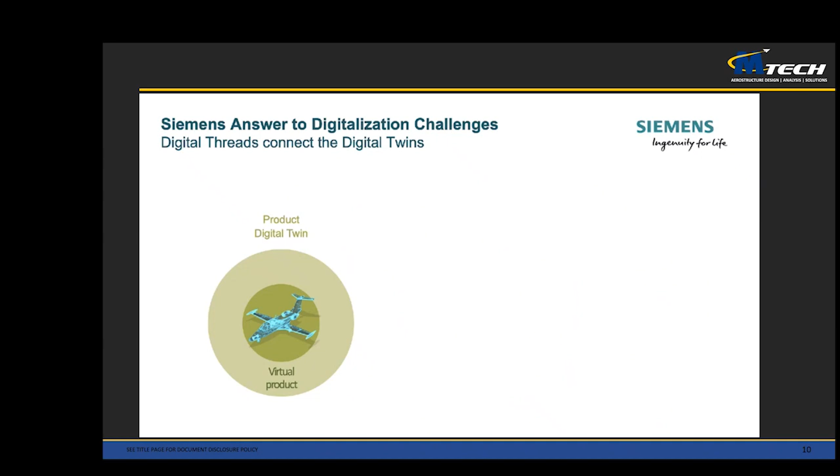The concept of the digital twin and the digital thread are related. A digital twin is something most of us are comfortable with—it's a model of a real device. In the aerospace world, we use various simulation tools and multiphysics simulation tools, and we create this virtual product, which shows what the plane's characteristics are going to be and how it's going to be shaped.

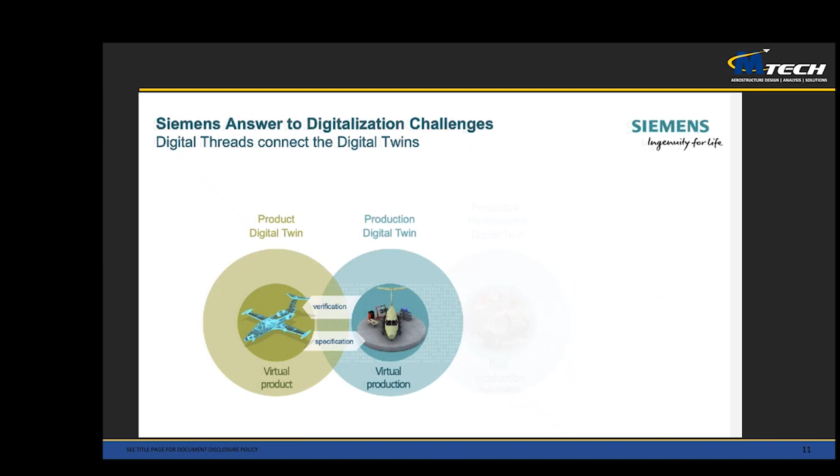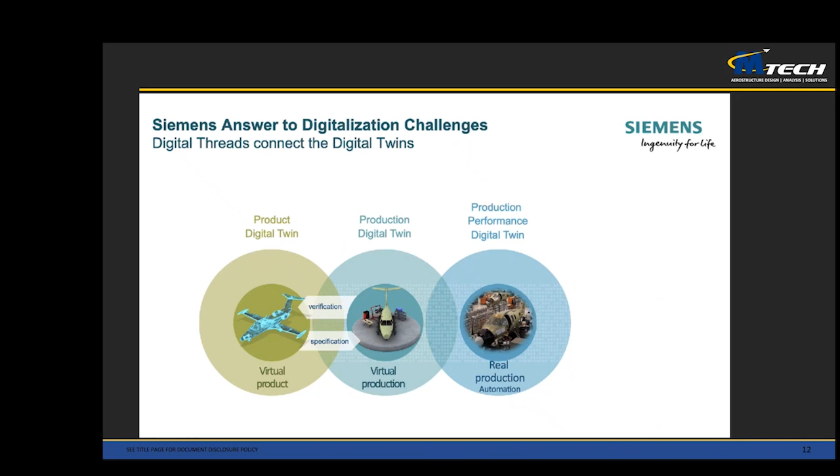We can use that to start to show how we would build such a thing and create a virtual production line—this is how the parts will fit together and where. Then we'll iterate back and forth between those two, through the agile process, making the plane better and better, until it's ready to go to real production. At that point, we automate the factory and make a digital twin of the factory, making sure the assembly lines are balanced and that the system can move forward in that way.

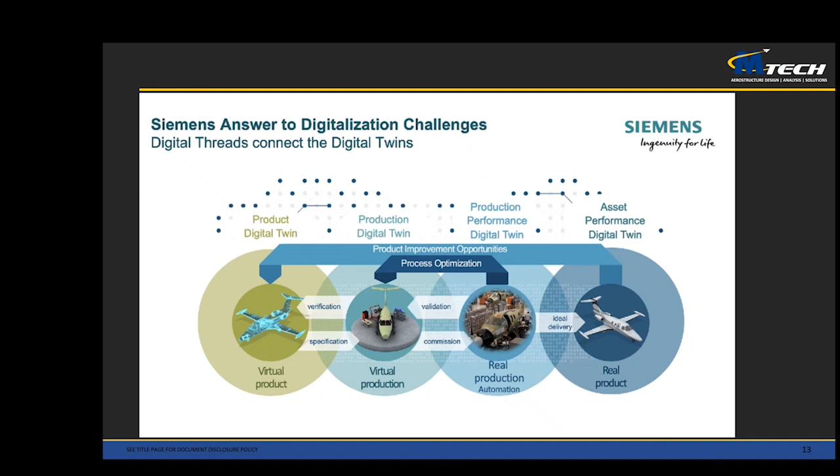We ship the plane. We have a digital twin of the real plane, and we're using that to track defects and to track customer support issues and service issues, feeding those things we learned back all the way to the beginning of the process, so as to improve later iterations of the same aircraft.

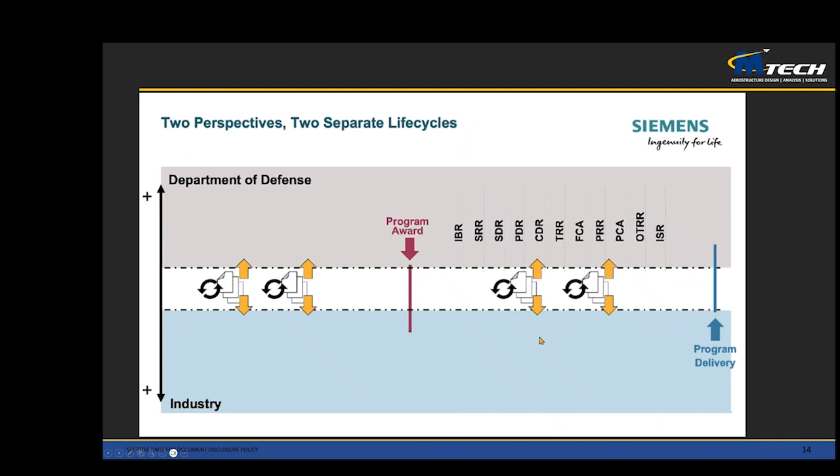Until now, we've had this sort of picture where you have the Department of Defense that defines what needs to be built, and then the industry that supports it—and there's a gap between the two. Defense is up here, and the industry is down here. These are the milestones we've had for decades that go through all of these steps to build a plane, and two of the ones we're going to look at are program award and program delivery.

Those are the two that people know the most in the process. Take the current B-21 rollout right now. We think about this process: it's two organizations taking all of their intellectual property and essentially dumbing it down to paper. We are passing paper back and forth today—I suppose they're in PDFs, but still it's paper. This is the state of affairs up until recently.

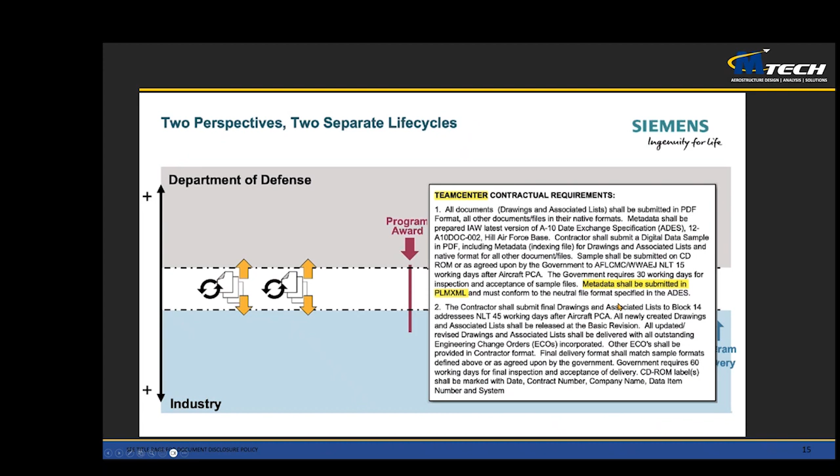Almost a decade ago, the Department of Defense started to say, well, we need to start to use PLM systems for this, and they said that data would have to be delivered in PLMXML, which works much better with Teamcenter.

Now, if we look at what's happening, it starts out in the Department of Defense with them defining the project, and then once the program's awarded, it goes into industry. So the Department of Defense is doing the requirements, systems engineering, and analysis of alternatives, meanwhile passing paper back and forth with industry to iterate on the process. We have cadence meetings. The industry now has the requirements management, design, simulation, and this follows multiple tracks as the program is built and delivered, and more cadence meetings, and again, paper, and eventually an airplane.

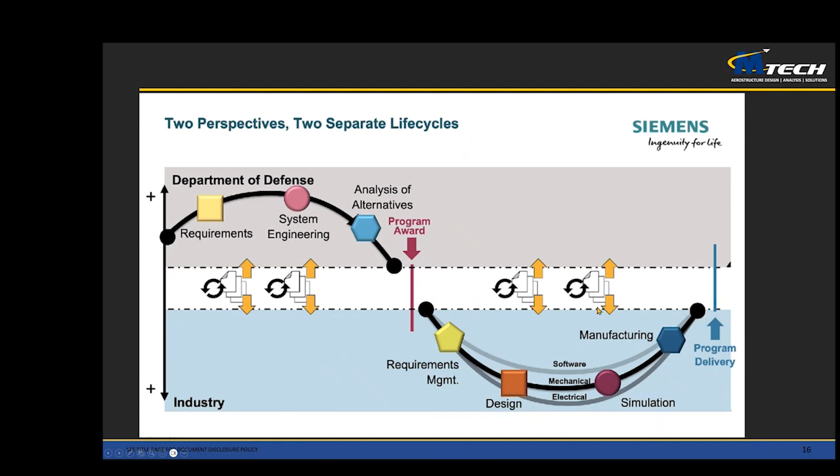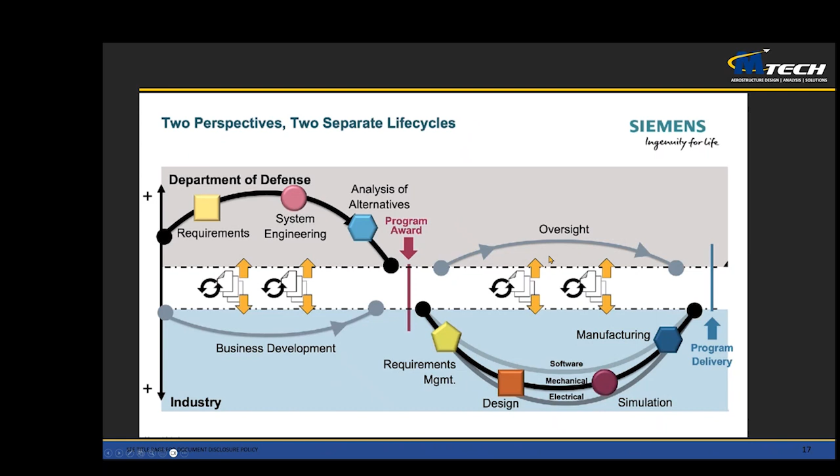Meanwhile, one side is actively working on the project and the other side is doing shadow work. When the project is being defined, industry is trying to help guide it to where they can build it. While it's being designed and built, the government is watching and providing oversight of the project. And again, paper going back and forth, cadence meetings.

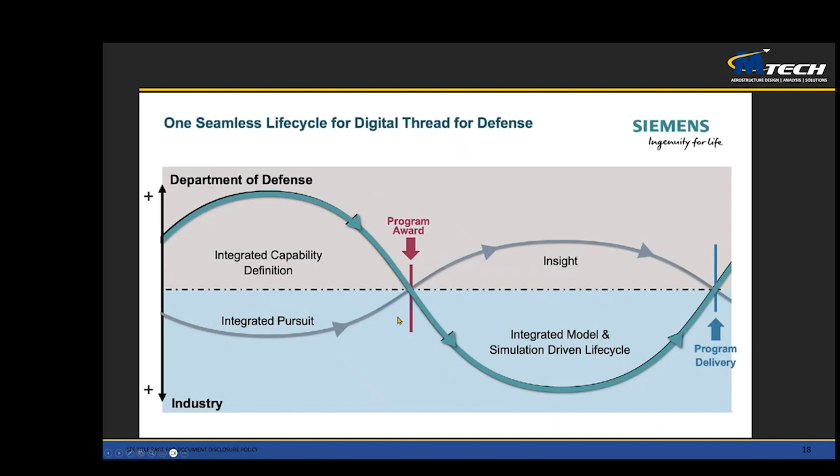That's what we want to get rid of with Teamcenter and Accelerator. It looks like this: we create one unified system across two organizations where we're no longer passing paper back and forth. What we're passing back and forth is models and the original design data.

And that allows us to take this process and shrink it. The program award happens faster and the program delivery happens faster. We've had planes now with this system to be delivered and built in 18 months, and it's an agile system.

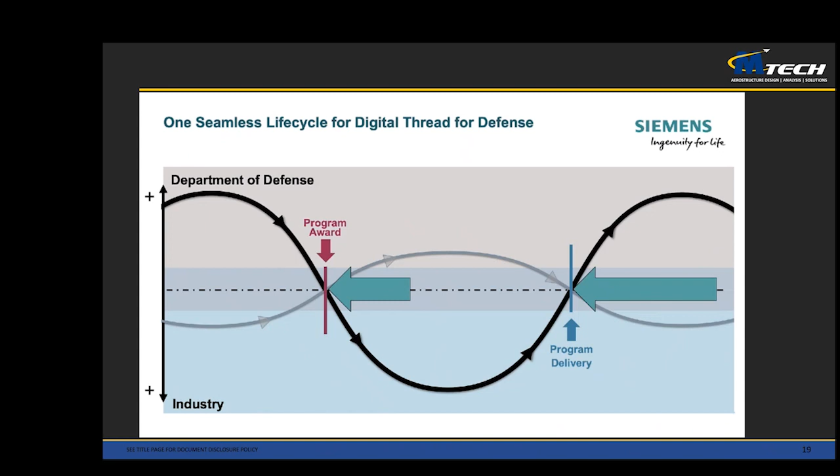So this plane delivered in 18 months is the first iteration of the plane. It flies. But then you can start to add ordnance to it, you can start to add other systems onto it. But you now have something to work with and the models to build upon.

When we think about how this process works, there's still a lot of steps, but the steps are now part of an organized flow between two organizations, and they don't have to send paper back and forth. They're all looking at the same database, and they're all looking at the same data.

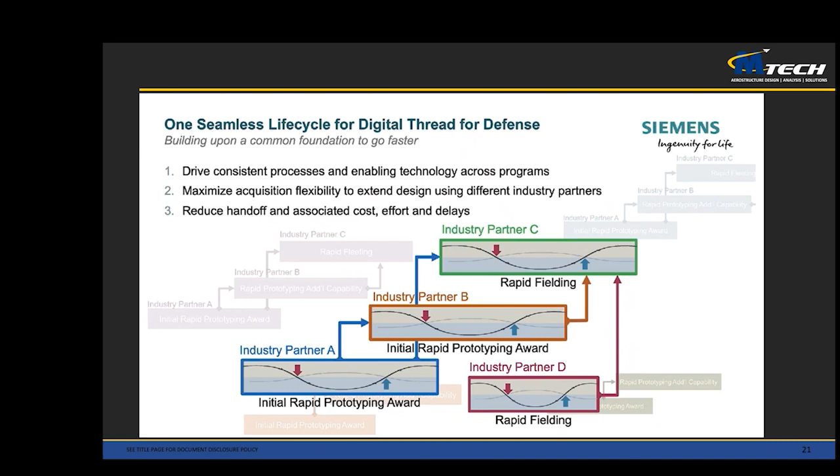And you don't have to do this with one partner. If you're going through this process with one partner or vendor, you could be going through this process with another partner. If you were the DoD and you find out who is going to deliver you the best plane, or a third, or you can take another partner and use them for fielding the plane. So you have flexibility—multiple projects, multiple partners across multiple phases—all because everybody is using a centralized database system to hold design data. So let's look at a demo, so to speak, of this process.

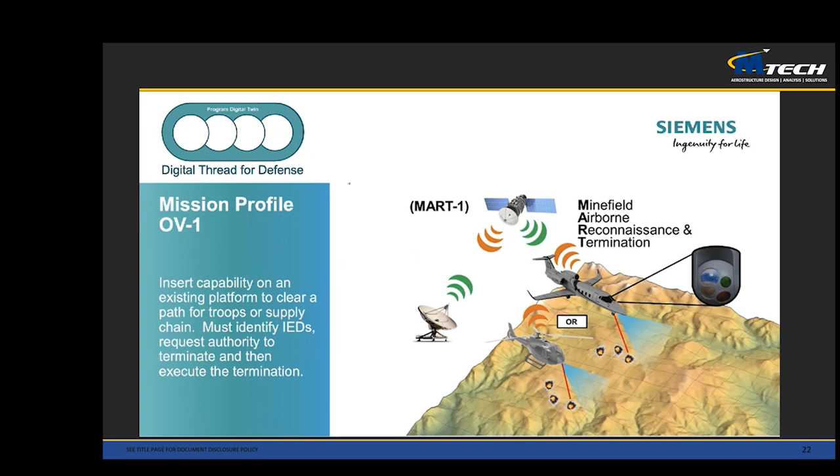So let's say there's a project and we need this project, and we would know how that would work. Think about this: the project is the fact that we have soldiers who are in areas with IEDs, and we want to have something that flies—an airplane or a helicopter—and looks for IEDs. As it flies along, it has sensors that recognize IEDs, sends back locations and requests to take them out, and then it can take the IEDs out before the trucks roll by—either with a super cool laser, or maybe simply with a missile. But this is the basic idea of what the DoD wants, a very simplified idea of what the DoD wants.

So how does this start? How does this happen? Let's look at this process—we're going to look at each step and a little demo of how each of these steps would work.

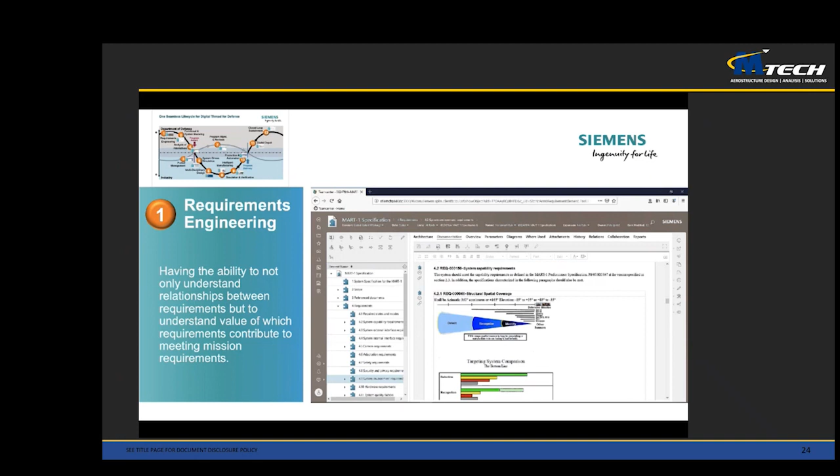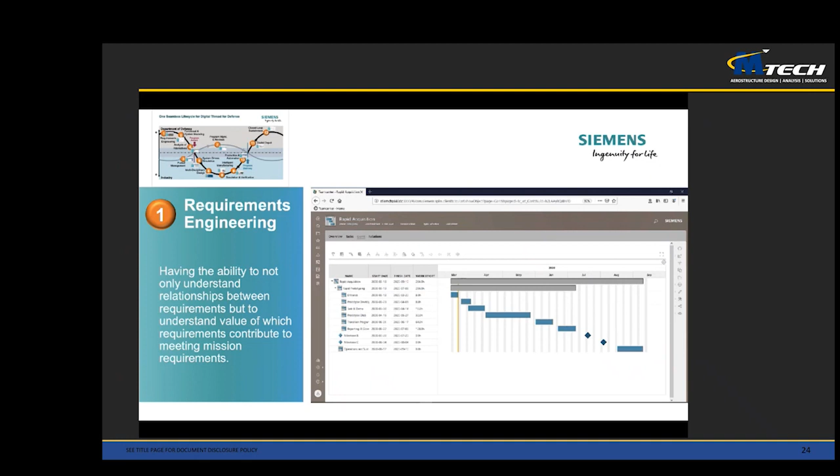Right at the beginning, we're doing requirements engineering, and this is critical. Mistakes made at this early stage that don't get caught are hugely expensive—they completely change the architecture of the following designs, and may create bottlenecks in materials or manufacturing. Things way back at the beginning that are not fully understood can wreak havoc with the rest of the project. So here we're taking those requirements and decomposing them, to get some sense of how these requirements will get turned into a design before we move on to the next step.

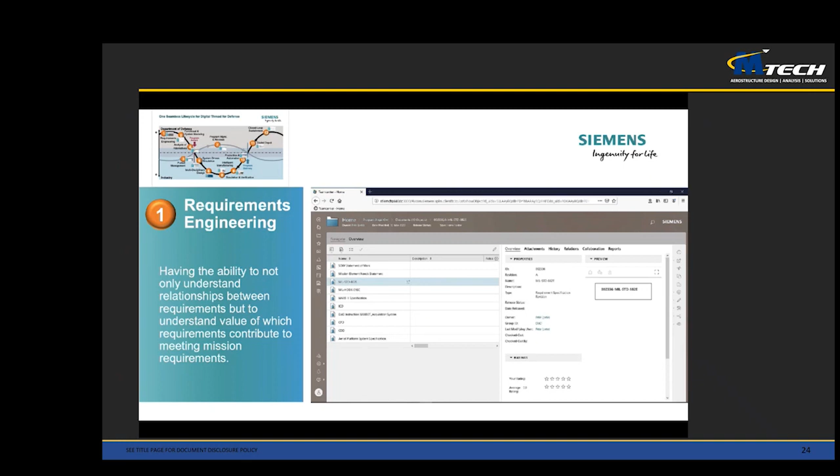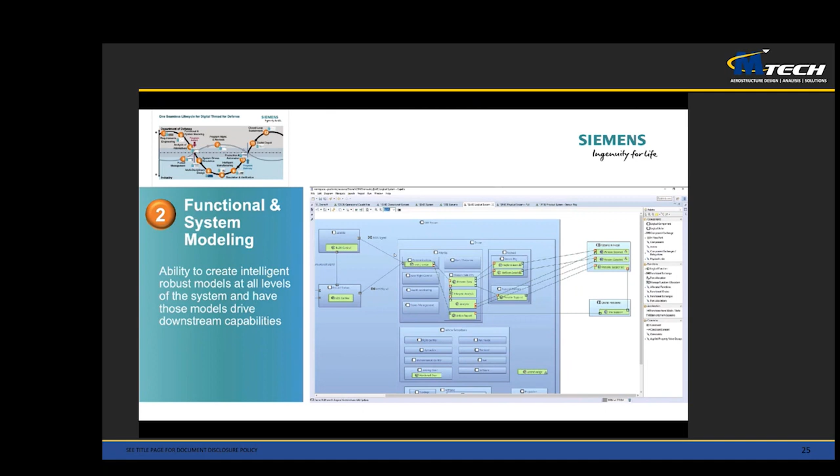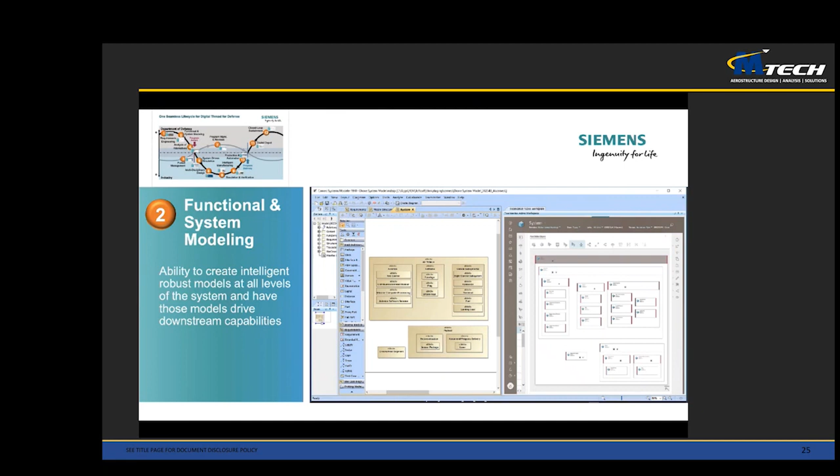There are multiple ways we can solve a problem, so we can use alternatives like the aerial platform. We don't know if it's a plane or a helicopter, but we know what it should be able to do, and we can put that in functional models that show us whether the system works. If it can't work, we can iterate early on before we get industry involved in defining what's physically able to be done. So at least now we have this model of what we want.

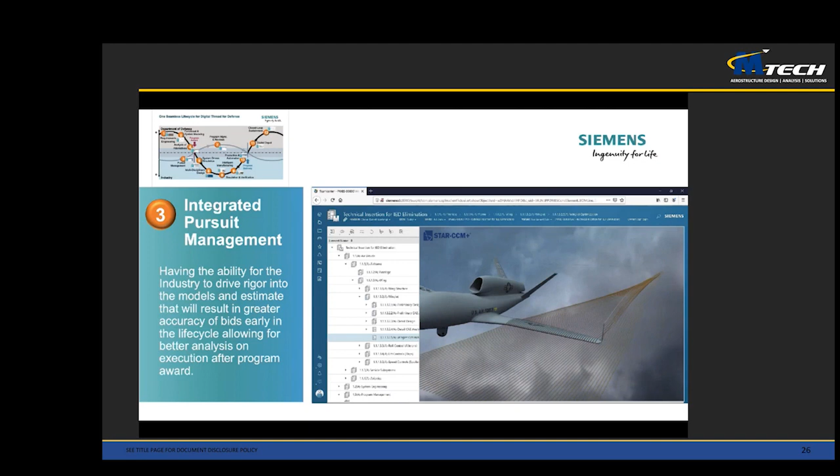Now the industry can get involved in shaping it before an award is even made. The industry can show different physical ways the design could be put together, and implement what up until this point was a theoretical model. The industry then passes these back up to the DoD through a system they're working in together, and the DoD can look at the alternatives.

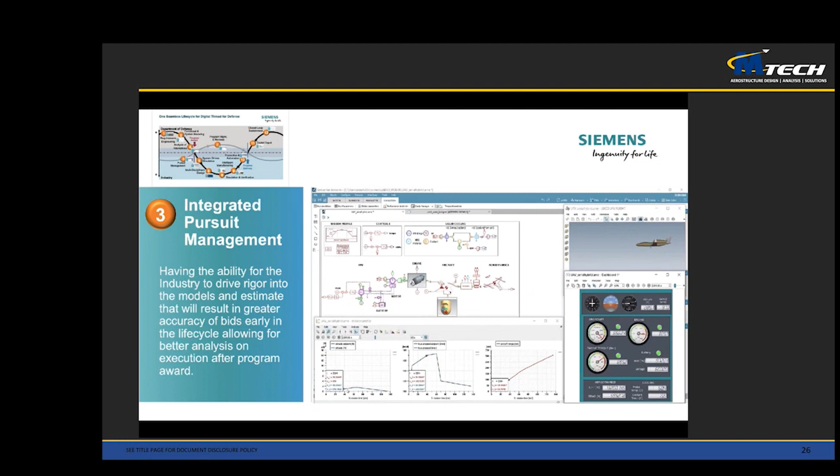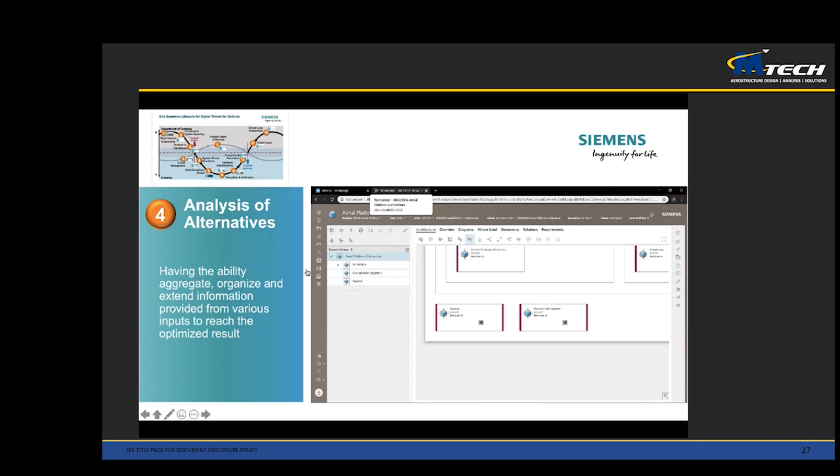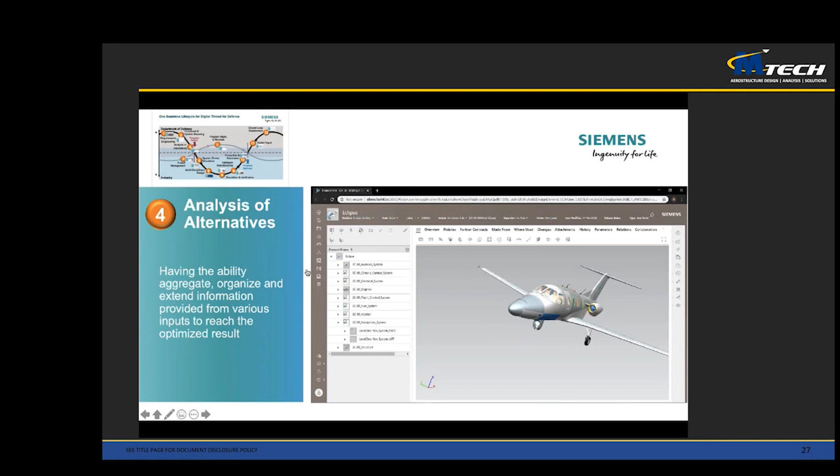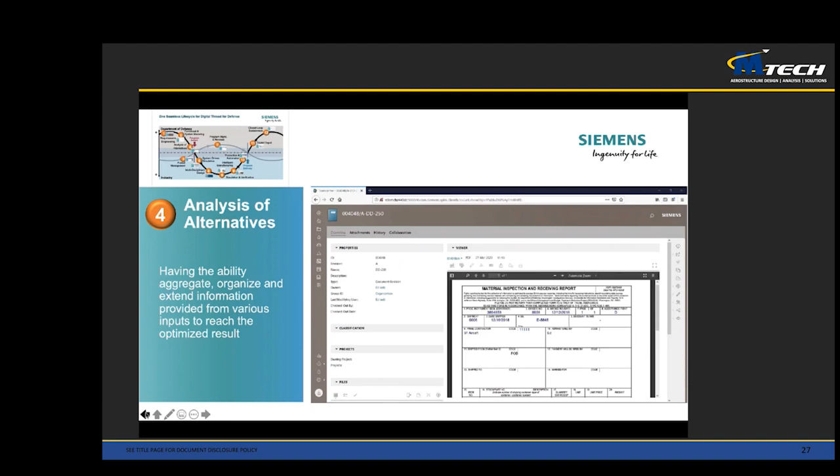When you get to the analysis of alternatives in the award program, you look at different bidders and how close they are to what you need, and whether their design is too expensive, too hard to build, or too hard to maintain. All of this can be simulated up front, comparing one design to another. Here's a helicopter design that doesn't make it, a different kind of airplane that didn't make it either, and finally you come down to the winning bid.

Now the project passes out of the DoD and into the industry partner who won the award, who starts building a design using model and simulation technologies, looking at different ways and approaches to implement what this partner helped create as the specifications.

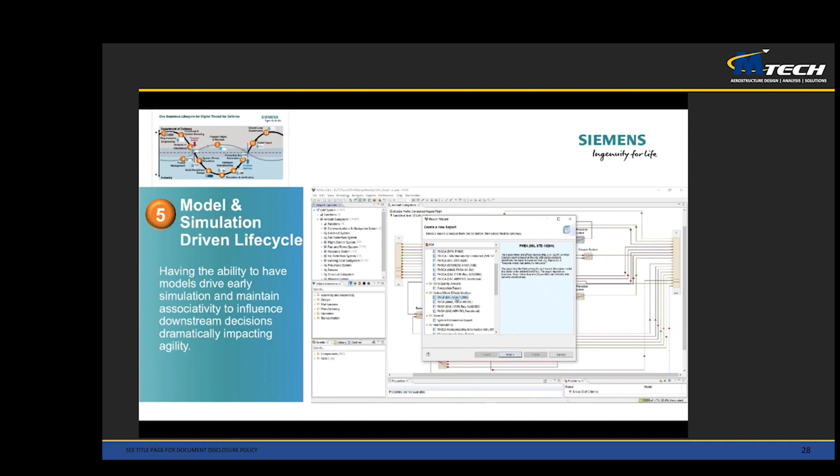The design gets decomposed into smaller and smaller parts. The parts have their own parameters about how they operate, and you can find out about failure rates and failure modes and things that don't work very early on in the process.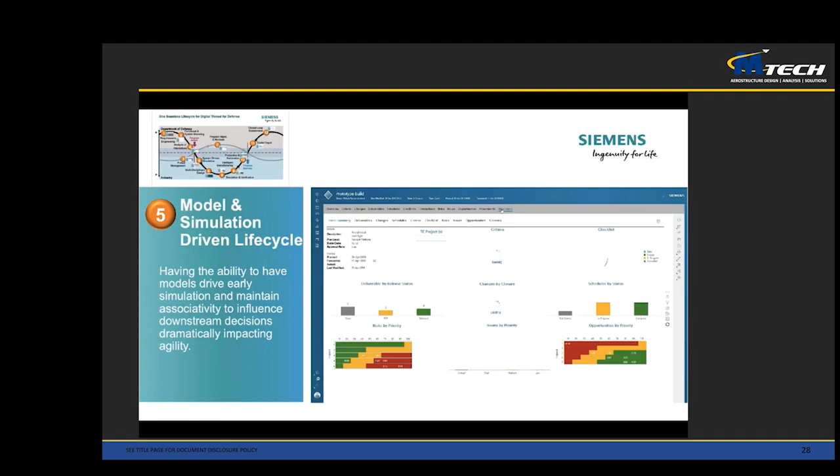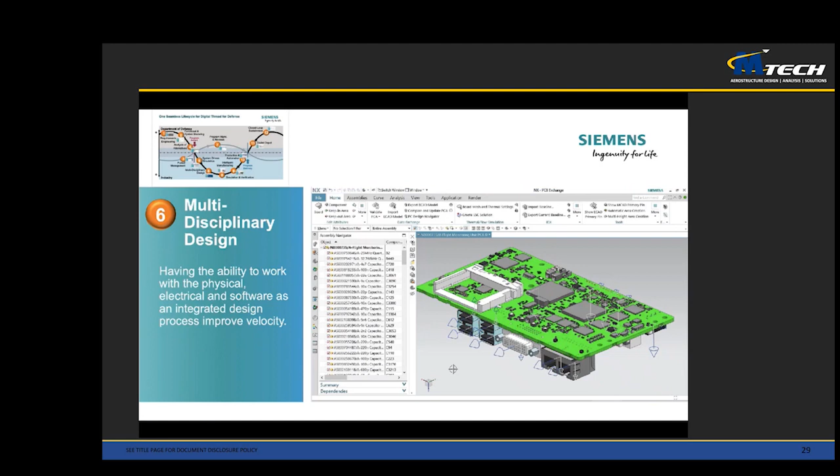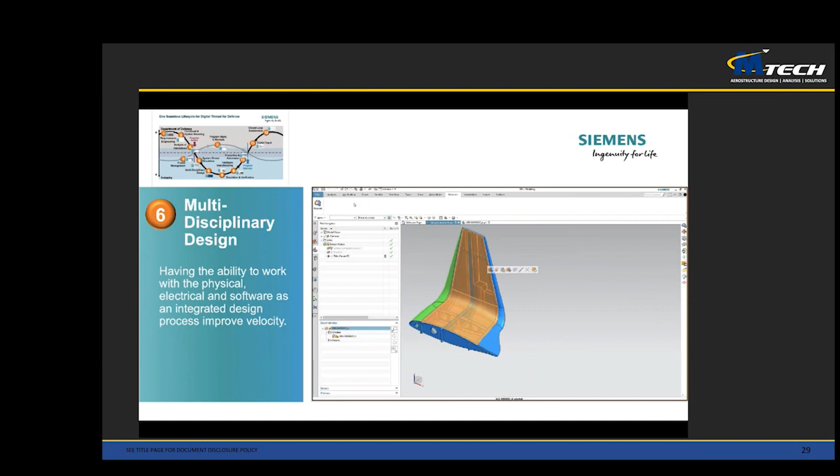We start to design different pieces of it together. We need electrical, we need the airfoil, we need metal, we need the electronics. How hot are they going to get and how do they fit together? All of this is simulated as you go, and all these pieces of the plane are in the database so everybody in the project sees all the parts fitting together.

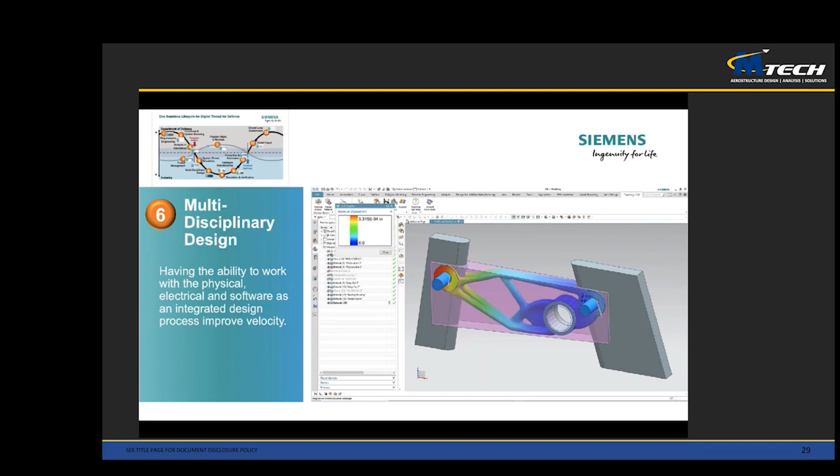You can try different shapes and simulate the stresses on them, coming to some early decisions about your design.

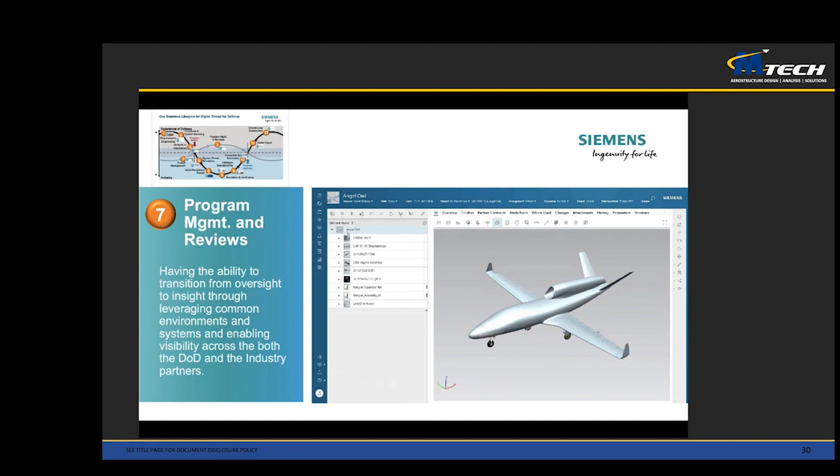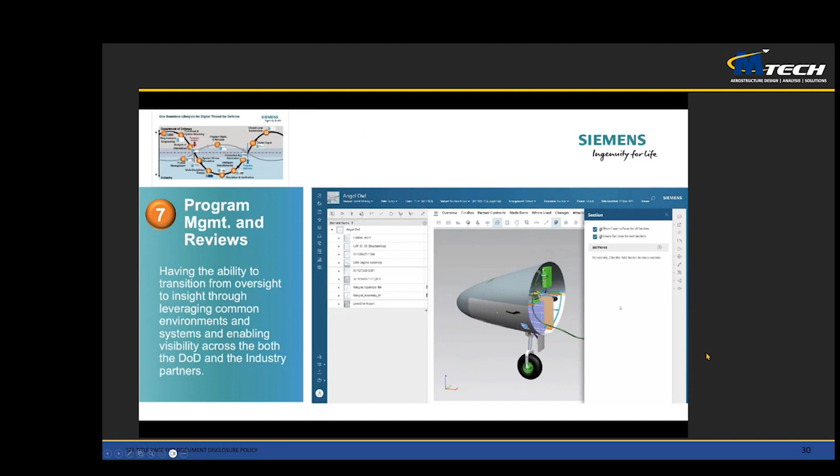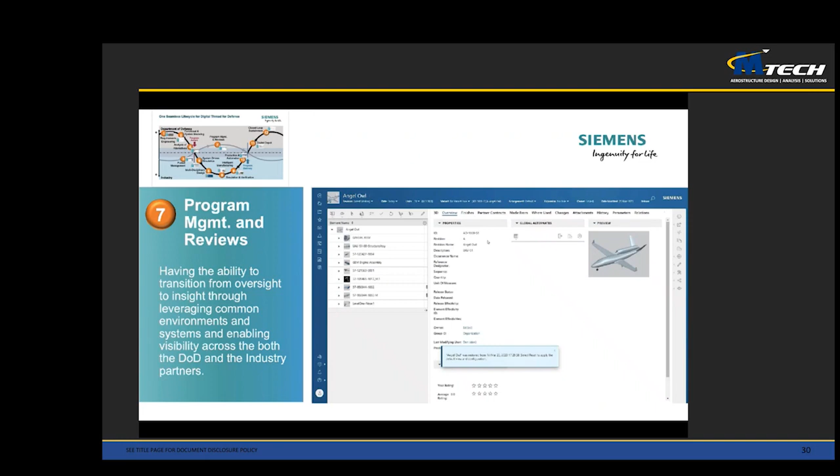While this is going on, the government in its oversight capacity can also look at the design as it's running to make sure the plane is doing what it's supposed to. Rather than going into a physical plane and opening it up to look at how pieces fit together, you take this model of the plane and open it up to see how it's put together, what it costs, and whether it meets the project requirements. You get into much broader sets of parameters to look at and see how it's structured.

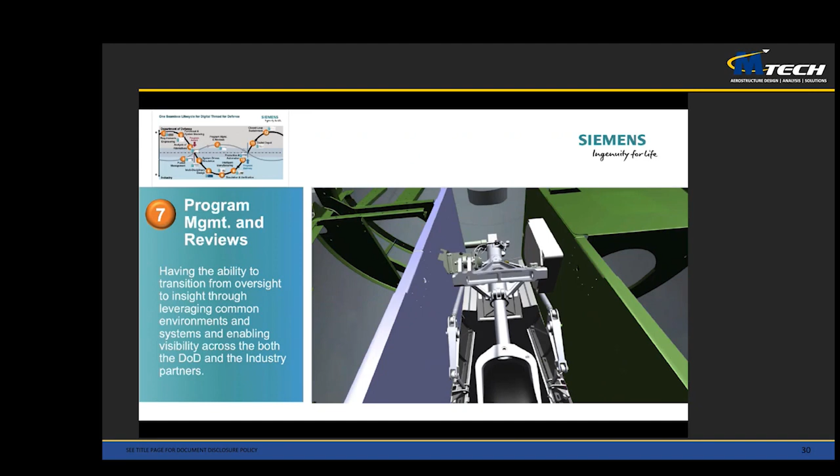The plane is essentially built in a virtual space, and in that space you can take the plane, take some parts off, and look inside to see what's what. This is all being done by the government in the process.

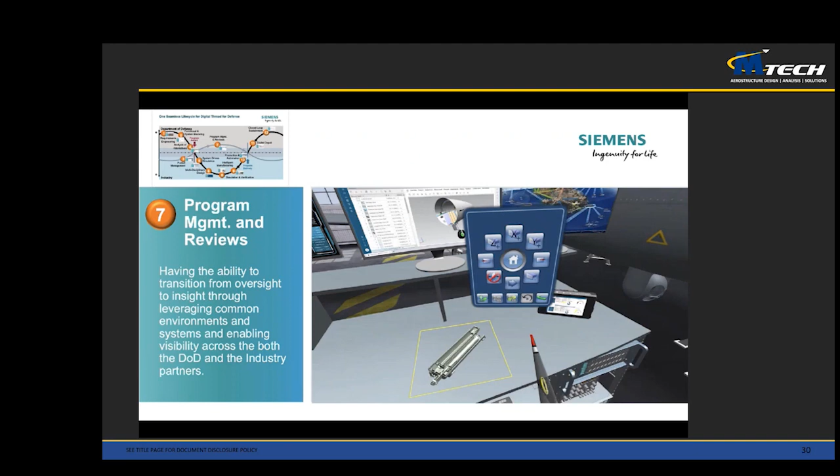You can even look at manufacturing techniques that might possibly be used to simulate, like how a drill might be used to put together this actuator part.

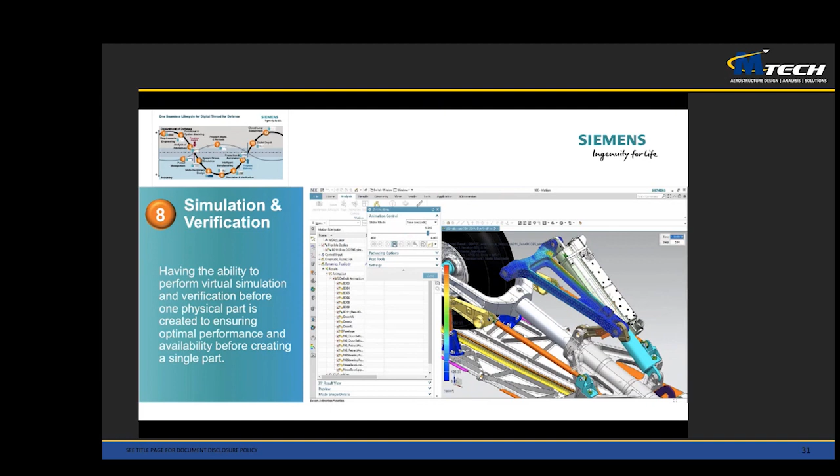Now that the design is inspected and approved, we can get into more detailed simulation. Here we look at the landing gear system and see how the wheel comes up and pulls in. We can look all through the plane and simulate different elements of it.

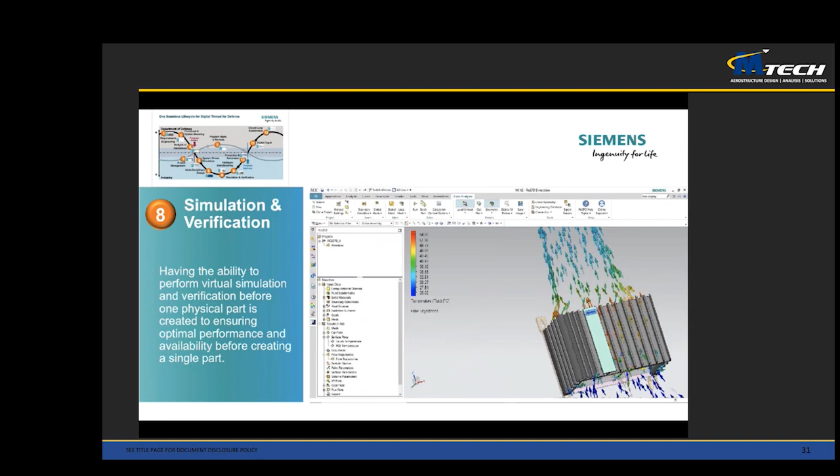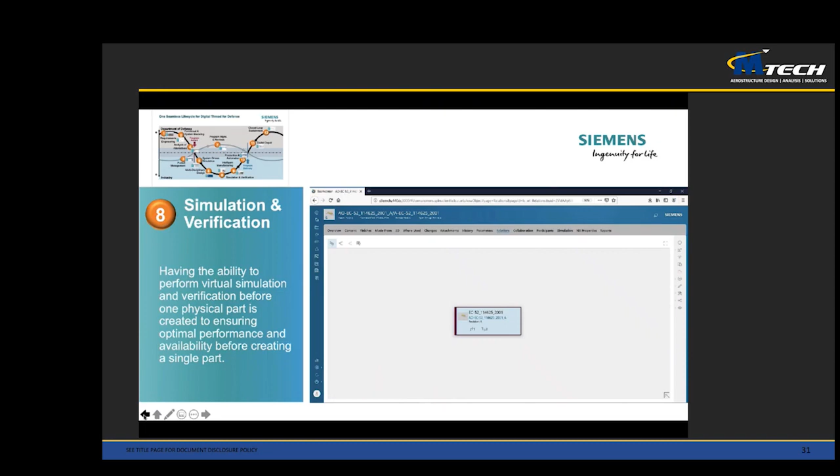This is where IC design comes in. We are able to look at the heat we're generating, the batteries, the airflow, and how it's all going to fit together.

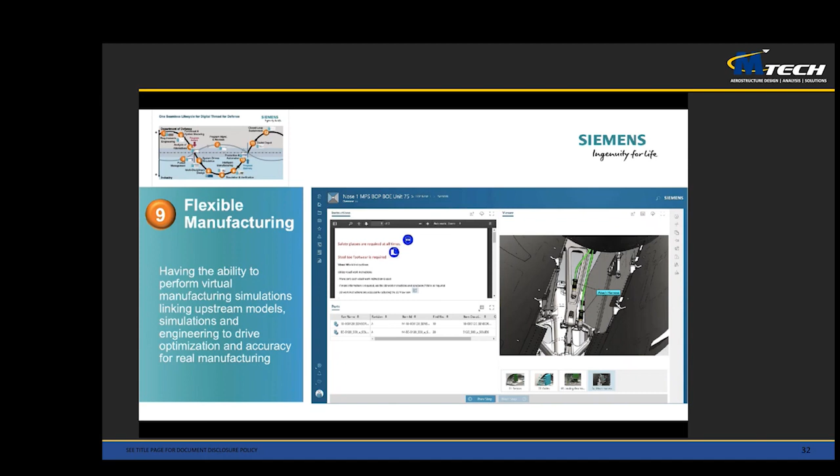Now that you have the plane designed and are ready to go, you have to think about how to manufacture it. You have the manufacturing flow where you see how the pieces will fit, and also how you create the instructions for how to make it.

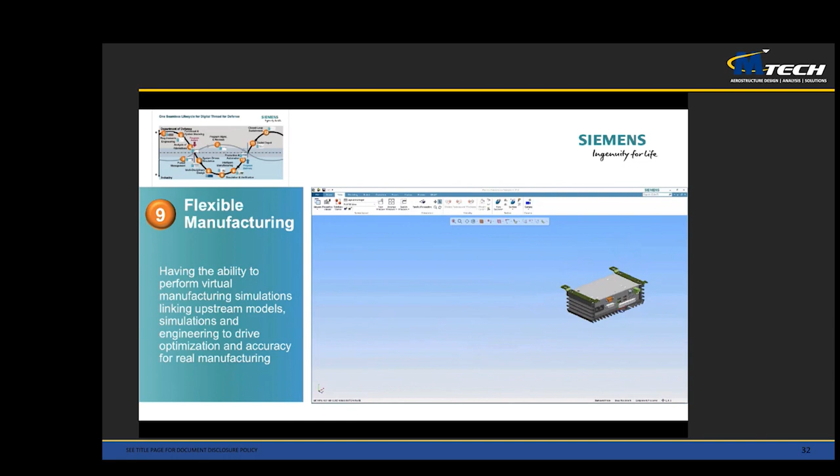So while you're simulating, you're also creating instructions, following the cabling, making sure it all fits, and seeing the process and steps of how and in what order we add the parts to this box to get it ready to be installed in the plane.

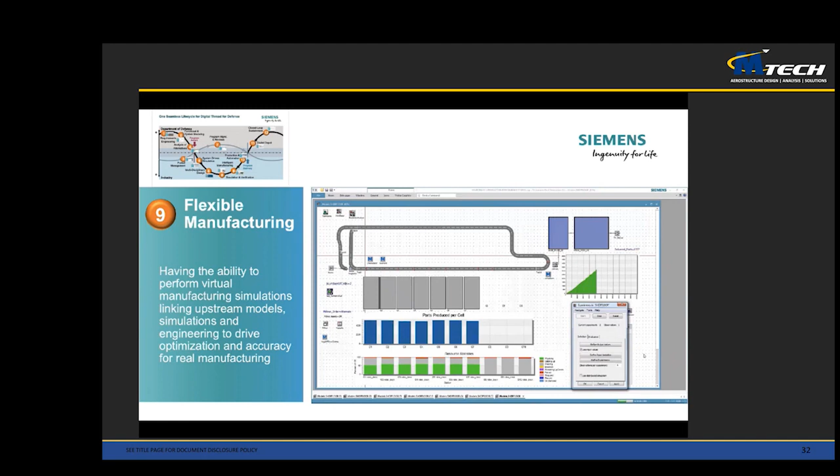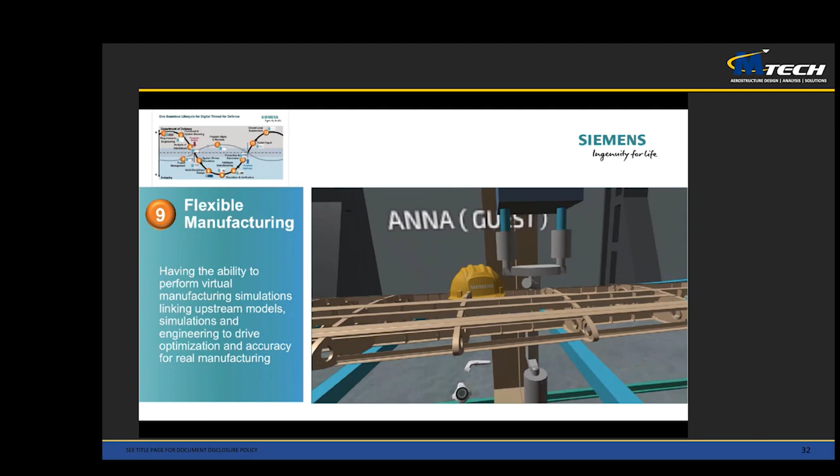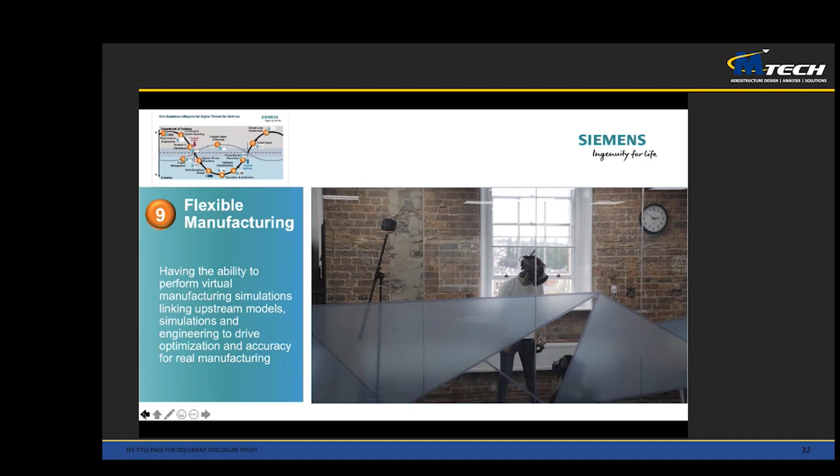We have virtual reality, a way of looking at the actual size of the plane as it's being built, and all the pieces and how they fit together, and whether all the tools can reach it. You may be looking at a design you thought was going to work, then realize this part of the plane gets tripped up against another part, and that's not going to work. We can get all of that figured out before we actually build it.

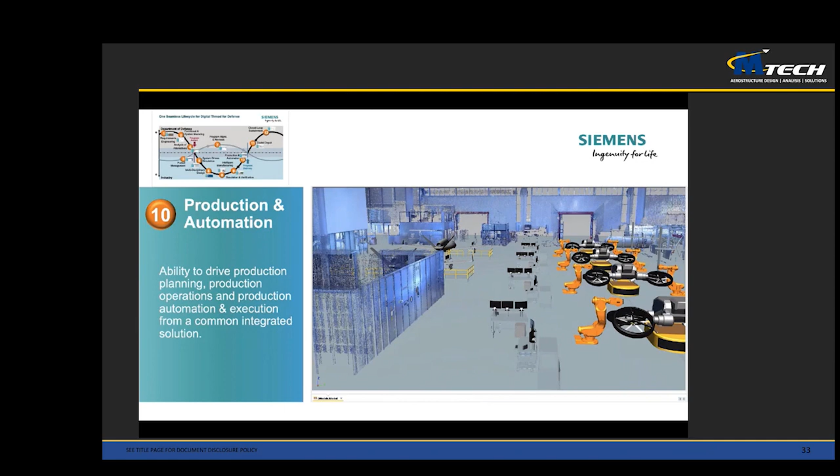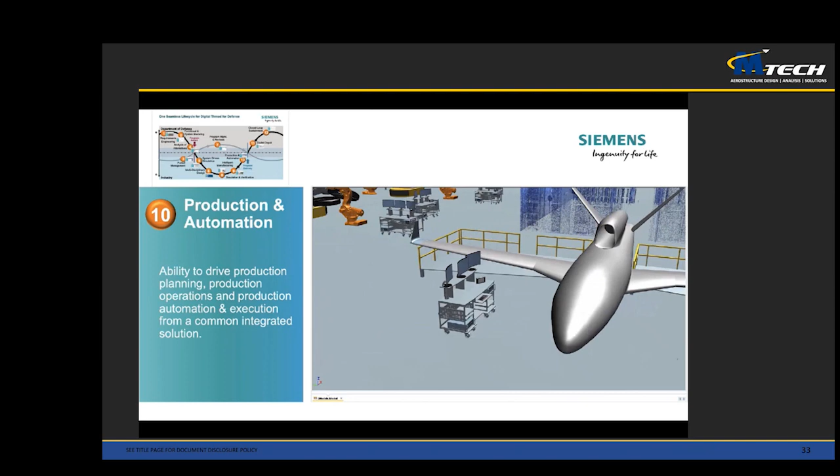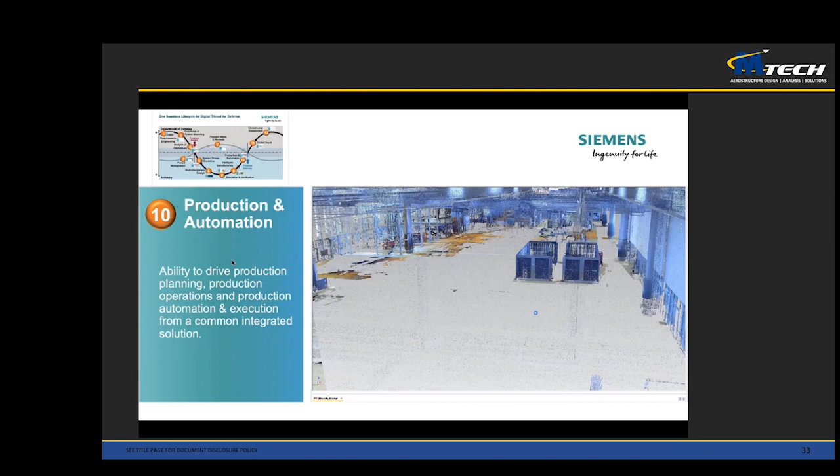Now we know how to manufacture the plane, we can simulate the shop floor where all of the planes are going to be built, how the parts are going to fit together, and how much space it takes. All of this can be simulated in Teamcenter, and all the specifications about the factory and the actual places that could be used to build it are uploaded into Teamcenter, so everybody has a common view of how these parts are going to be put together.

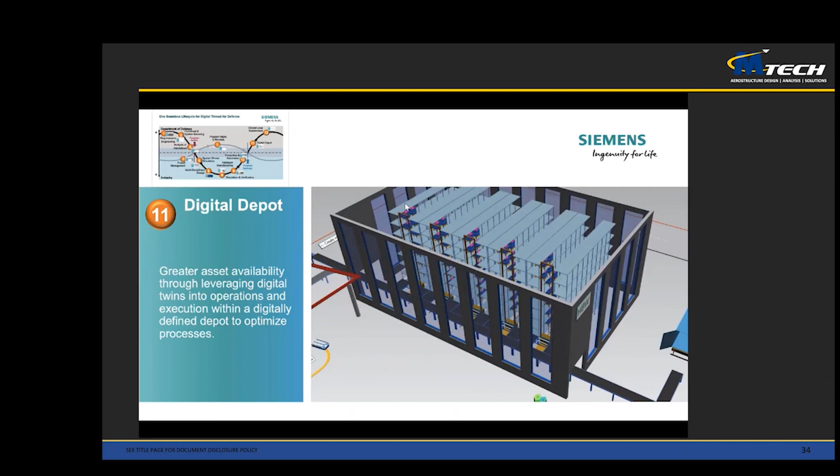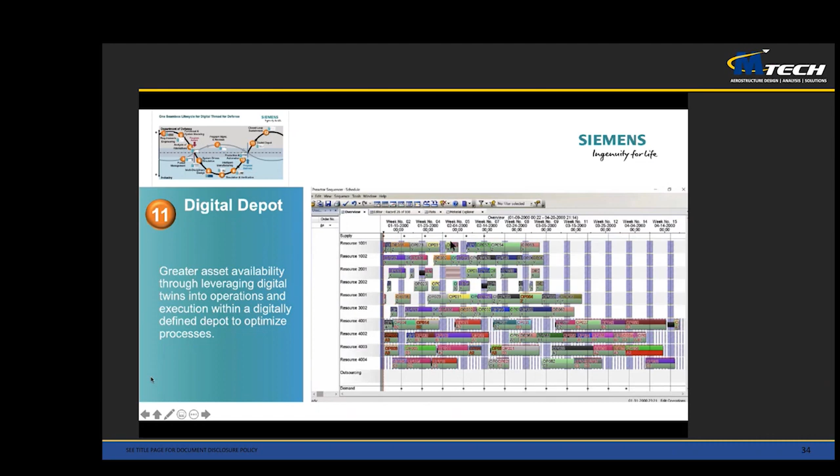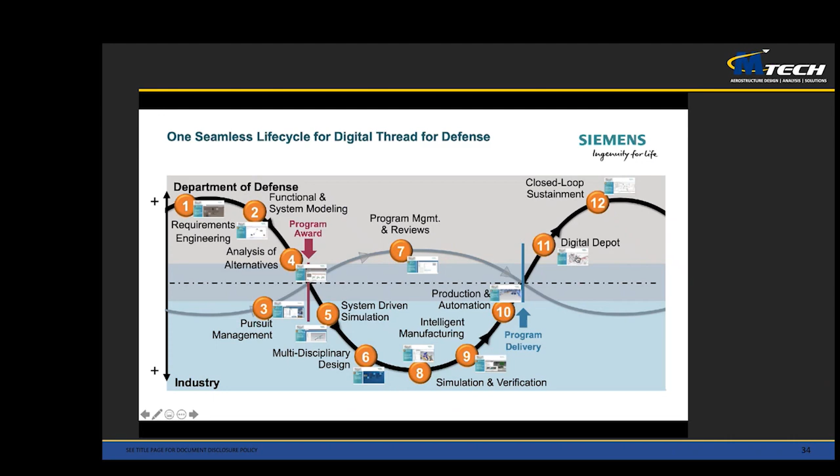Now we've shipped the program delivery, and we want to see how it will be built. The digital depot lets us look at where the parts are built, where they're going to be shipped, how far they're going to travel, and the path they'll follow. Is there anything that would get in the way between one plant and another? All of this is simulated, so the scope of the simulation spreads out over the course of the project, letting us have a more efficient manufacturing system without surprises, such as a tunnel that blocks a critical piece from being trucked from one place to another.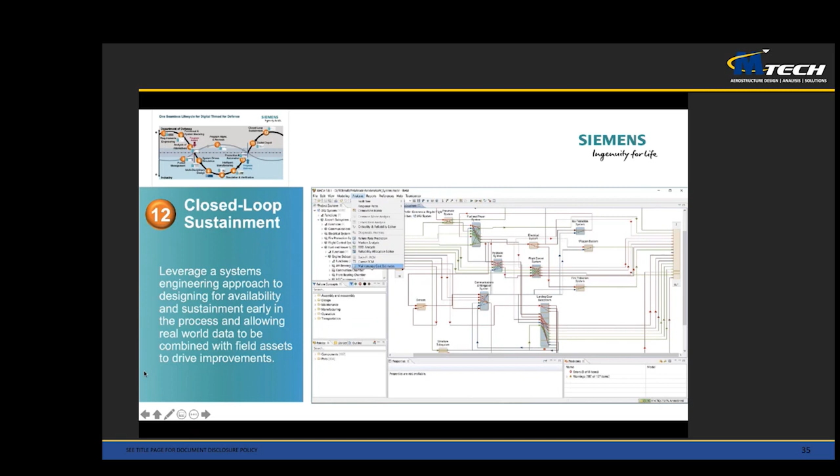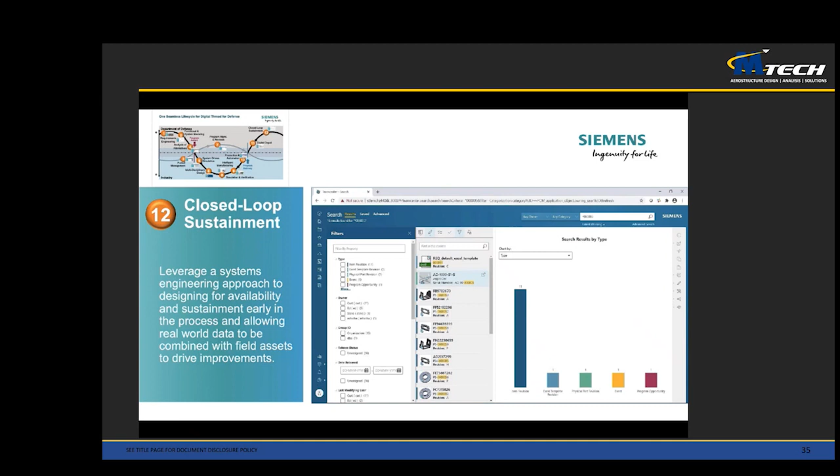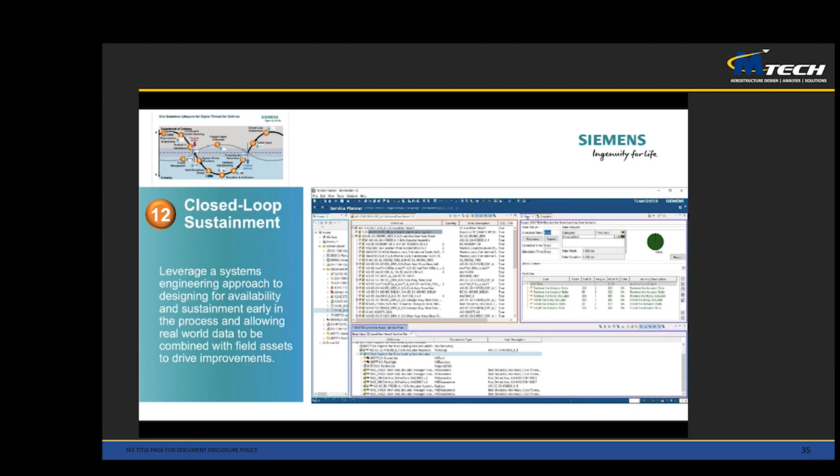And then finally, you have a plane that's out there, built. Now that it's shipped and out there, it's going to need service. We'll find out that there are parts of the plane that aren't working the way we thought they would - they're wearing out more quickly, or elements aren't working in the field the way we described. No matter all the simulation we do, it's eventually going to be in the field, and someone's going to work on it. That data is captured and put back into the system, wrapped around a closed loop to improve the next iteration of the plane or the parts we're putting in it.

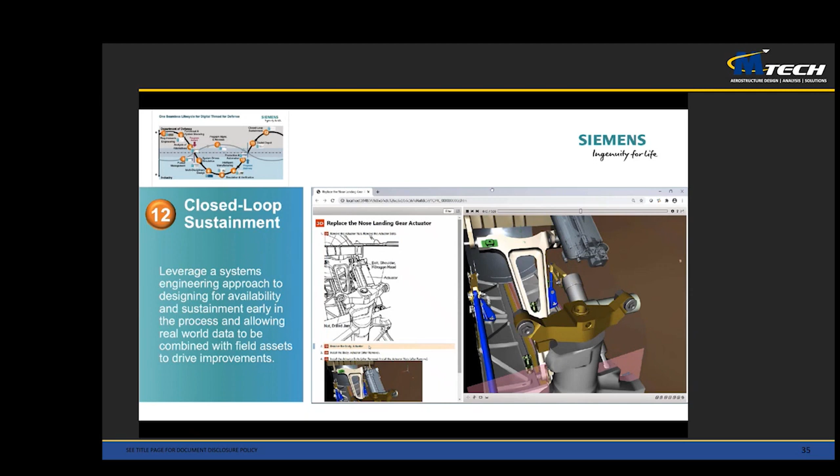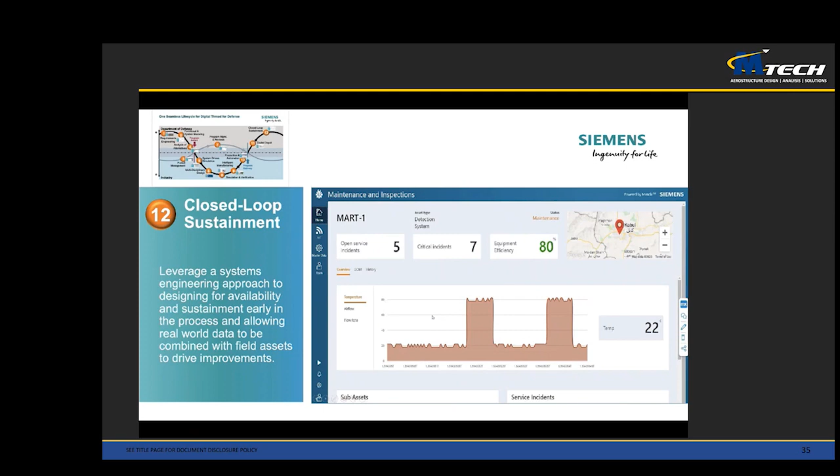So you can see, for example, this wheel actuator - we can see how someone would work with it, so that if a service tech needs to replace it, you see where it is. You make sure it works, and you keep track of the stats about how all the different parts are doing, and what it's costing to maintain this plane.

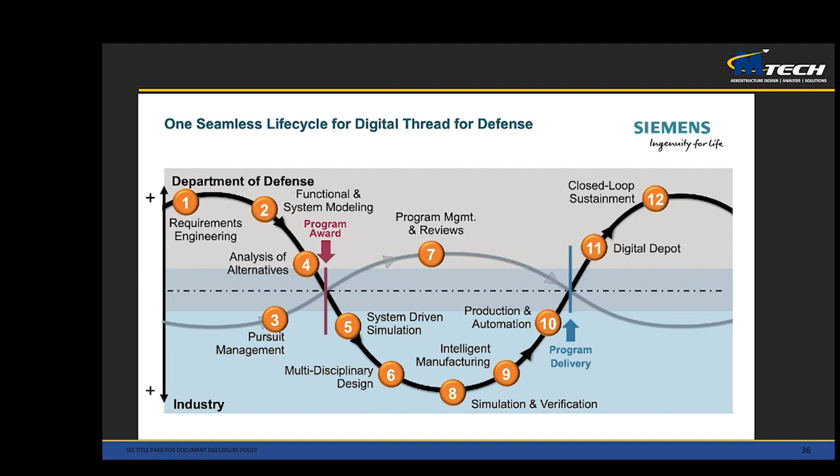So now we've worked through the whole seamless flow. We've had one view of the plane shared by the Department of Defense and industry. Both sides are constantly working with the same model, and the model goes through the thread from design requirements over here, constantly being improved and worked upon until it ships over here. This process from here to here could be as little as 18 months, and has been as little as 18 months for a brand new flying platform.

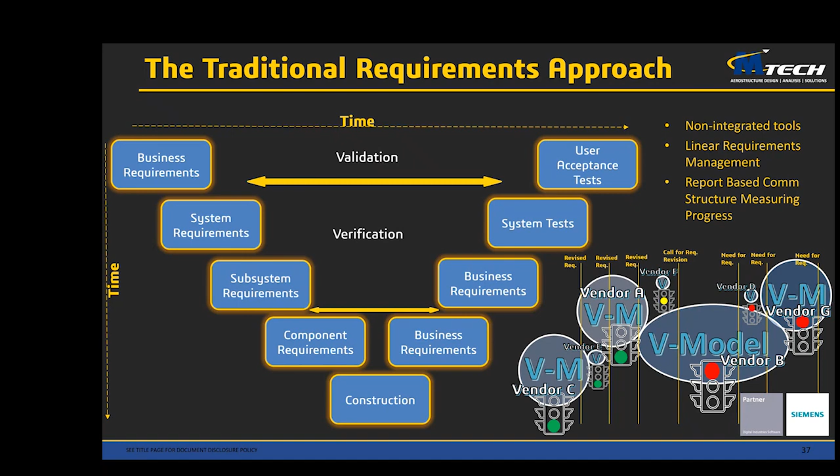So how does this affect us? Well, we've reached a point where we've gotten so good at the engineering of components that we're pigeonholing our ability to complete full system validation of requirements on time. We mentioned the industry is spending between 30 and 80% of their time on systems integration. Multiply that time by a number of subsystems, components, and vendors, put it in a linear reporting structure, and you can see why there are months to years of delays on the line.

Imagine now shifting this all left. Imagine receiving a model, and as contractors or even subs, we invest our IP, while at the same time other contractors in their fields and disciplines are also working to pass their models back into Teamcenter, so they can be part of this higher level simulation, all drawing from a single source of truth, updated as part of one central model-based ecosystem.

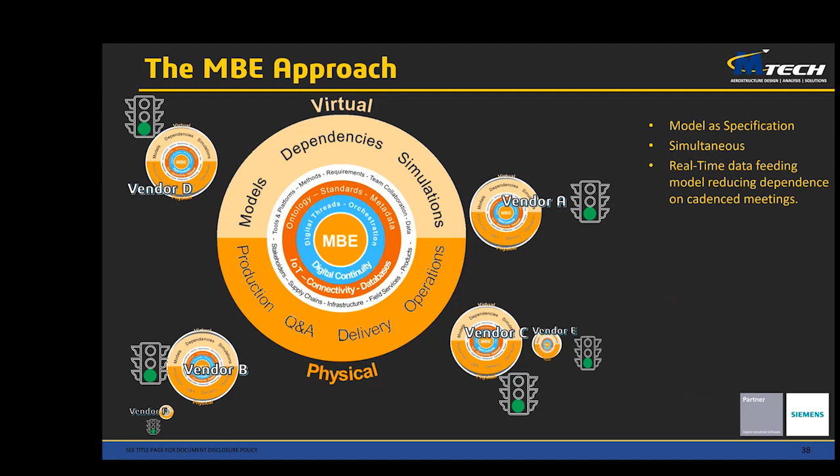And in the end, what happens is we take this plane, or assembly or sub-assembly of a plane, that we conceived of electronically, and we find we've got an actual plane - that the project we worked on had low risk and much faster turnaround, because all the parts of the team, the team of teams really, were able to work together simultaneously.